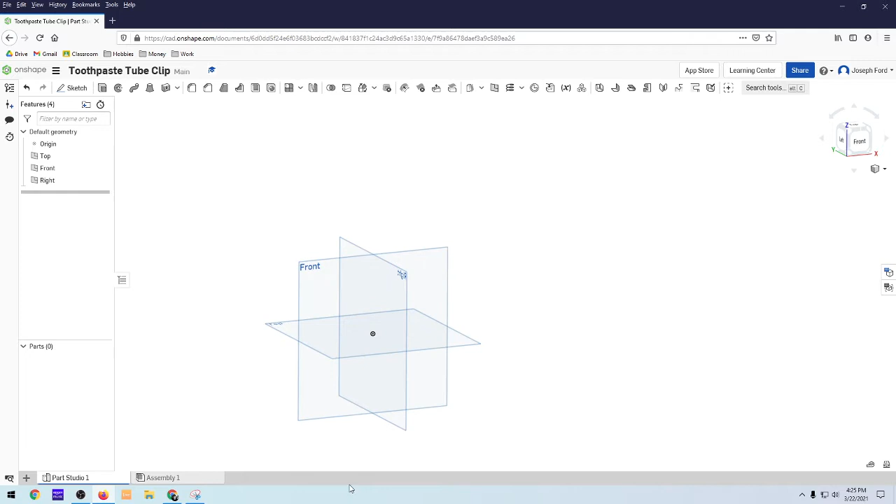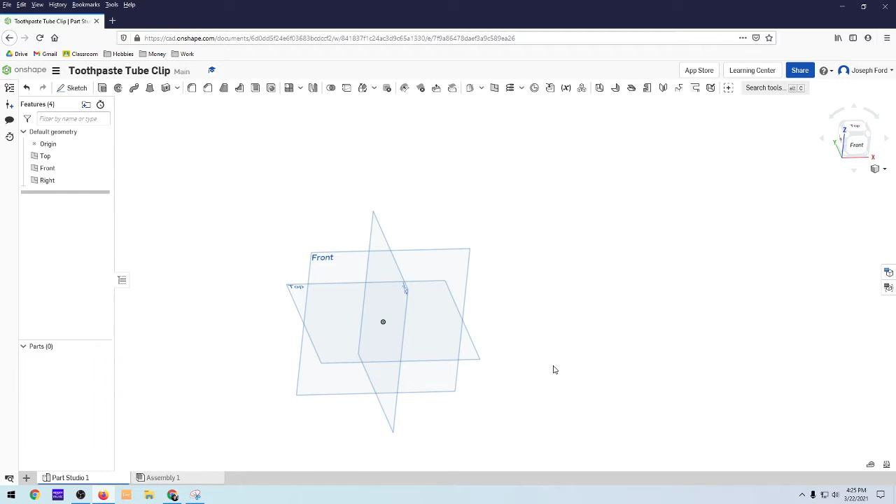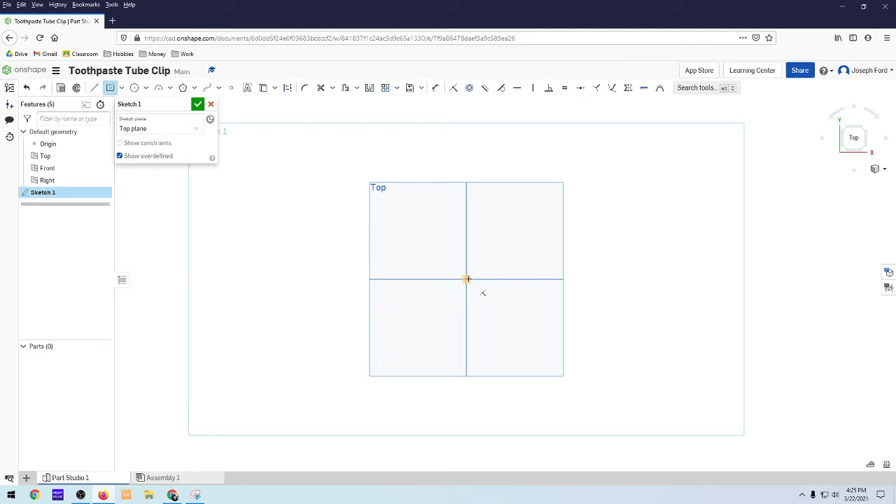First things first, I'm going to make sure the units I'm using are in millimeters. So go down to workspace units, and they indeed are in millimeters. Now I'm going to start with a rectangle on the top plane. I'll go to sketch, click on the top plane, and hit the N key to get normal to that plane. Now I'll click on center point rectangle, get the origin box, click, and make my rectangle.

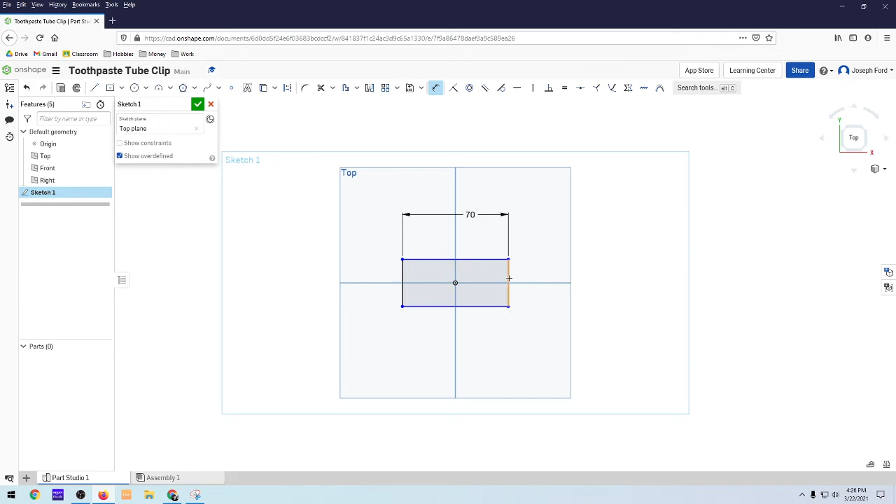I'm going to dimension this out, so D is the hotkey for my dimension. Click up top, and that's 70. And then the side, or the width, is going to be 30.

Now I'm going to continue and make another center point rectangle. This is where the tube is going to fit through, right here. And D for the hotkey on that one.

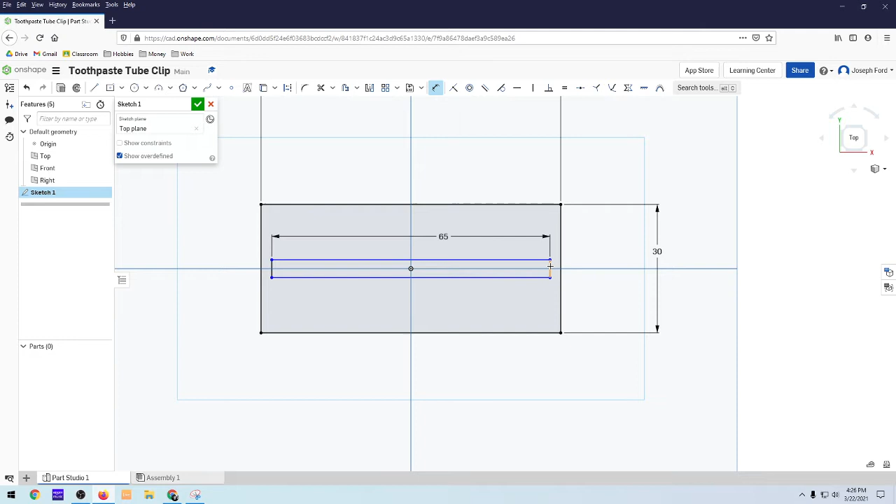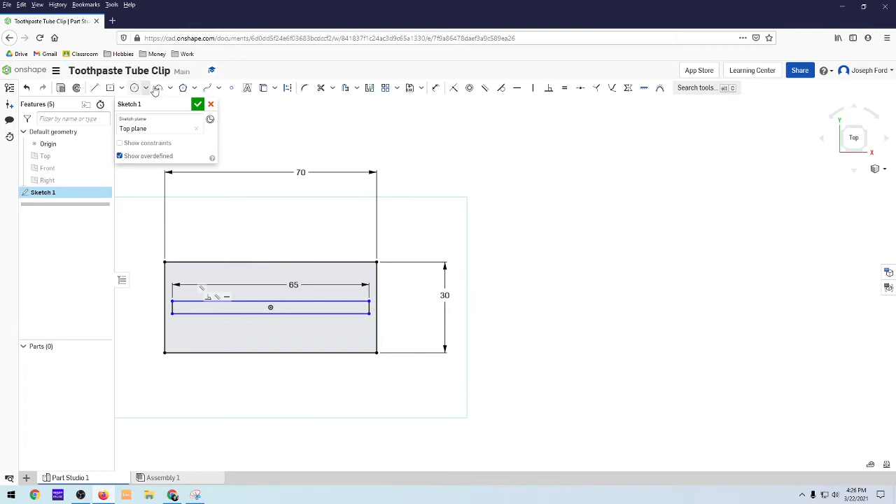65 is used, and the width - what happened there was it happened to click on the plane. So what you can do is get rid of the planes with the hotkey P, if you're not using them at this juncture. That gets rid of them so they're not in the way, and you can just hit P to get them back again. Dimension the side, and that's going to be 1.5.

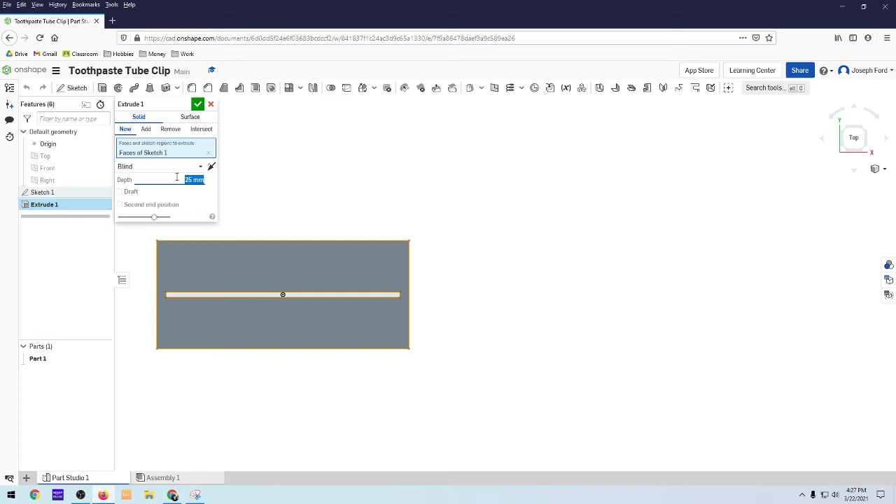Now from here I'm going to extrude out that cube, and notice how that little insert is in there, so that's cool. I'm going to extrude it out by 7 millimeters to make it a three-dimensional part. And that is very cool.

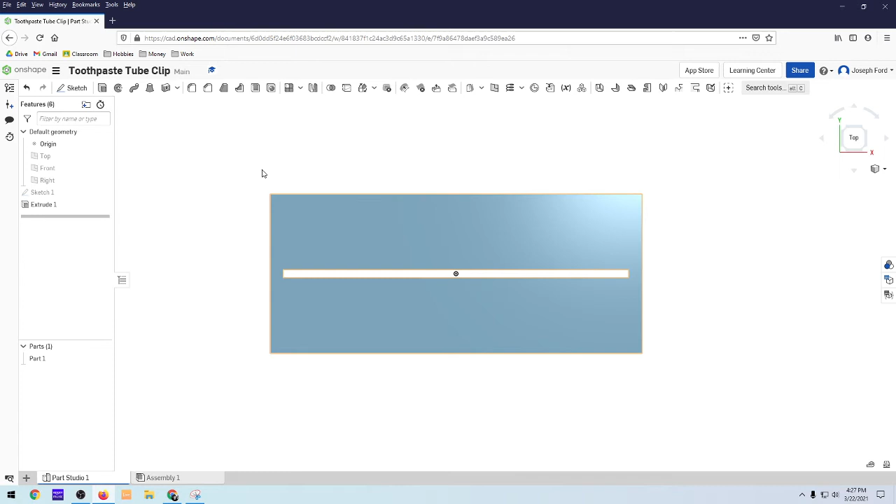So from here, I'm going to make it look a little more stylish and a little more functional. To do that, I'm going to cut some things out of this box. Sketch, click on the top here, and now I can start using some arcs.

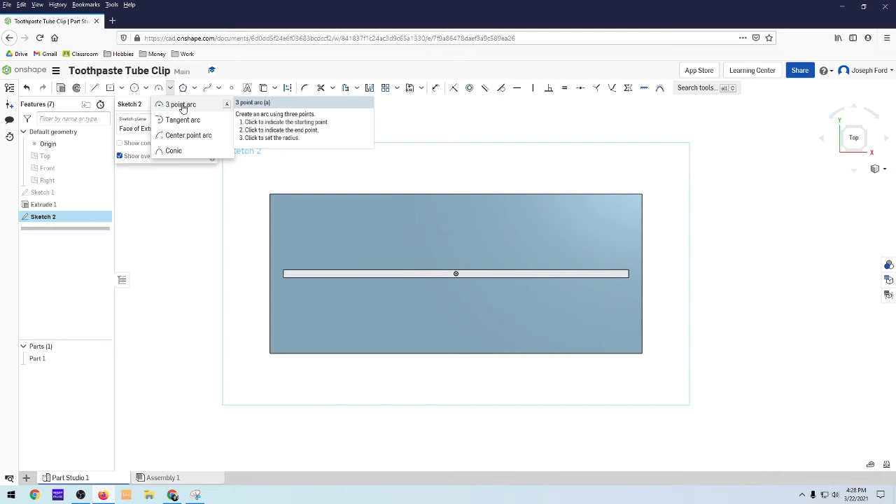A conic arc - you'll have the directions right there to the right. Click to indicate the start point, end point, and then the control point. Tangent arc, 3-point arc - there's all sorts of different arcs, usually with a start, end, and then the radius. We're going to use the 3-point arc, clicking on the start point, the end point, and then as far up as we want to go. And that'll be good right there.

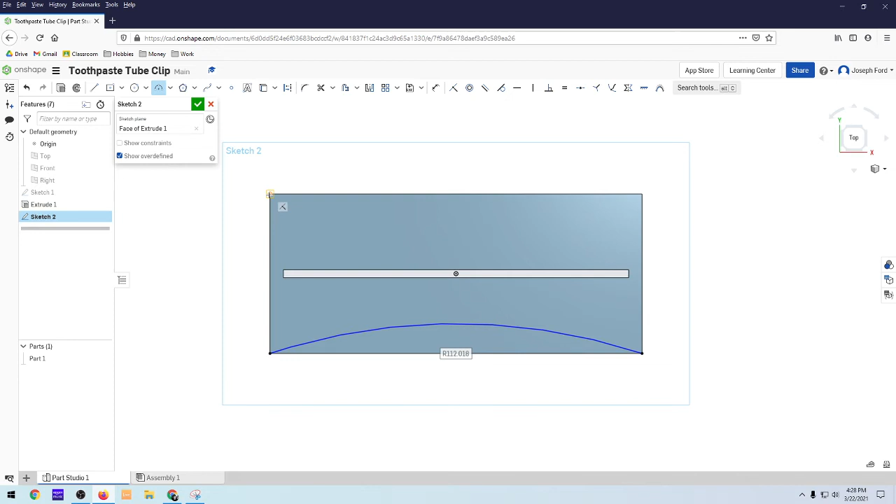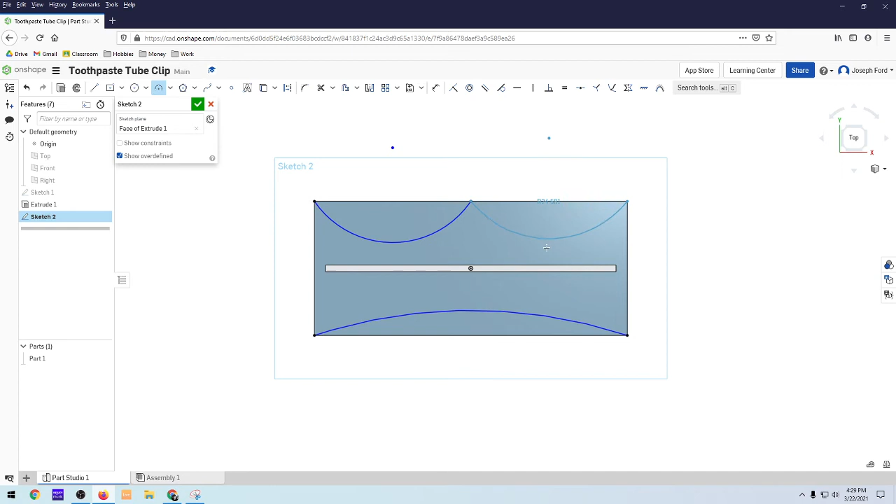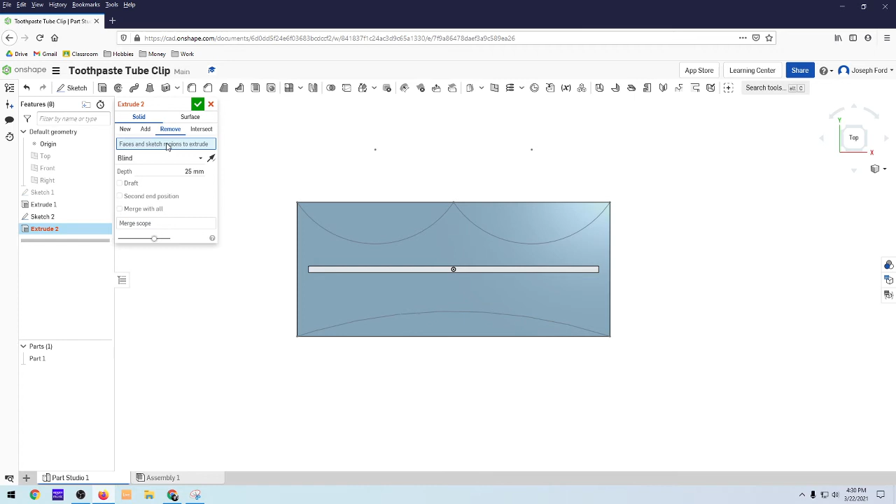So from here I'm going to click on extrude and remove, and click on all the areas I want to cut out. Let me just do that again - I'm in my sketch, click on extrude, click remove. I'm not going to faces of sketch 2, I'll just get rid of that because I didn't close it in. But I can select the regions - select all these regions to cut out and check it off.

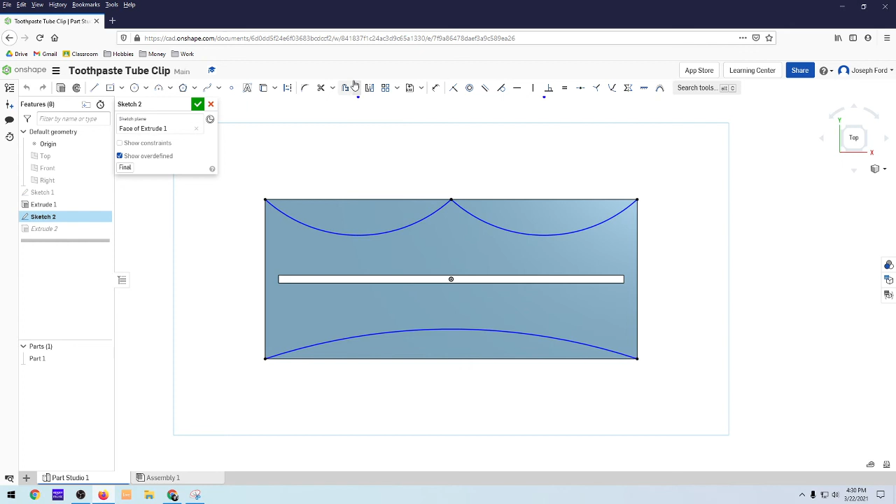Now looking at it, maybe I want to tweak it a little more so it's not as sharp. You can just go back, double click into sketch 2, and tweak your arcs so maybe you want them a little shallower, not as large. Same thing here, maybe you want this to be a little more up. Again, it's up to you what you want to do with it. That looks a little better to me, so I'm going to keep it like that. Feel free to play around with it.

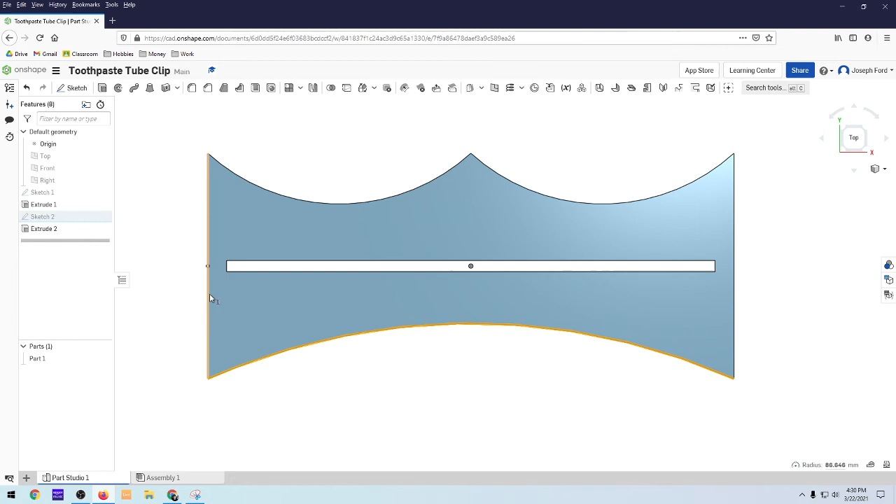The next thing we're going to do is add a chamfer to the slot here. That button is right next to the fillet - the fillet, and then there's a chamfer. So click on the chamfer.

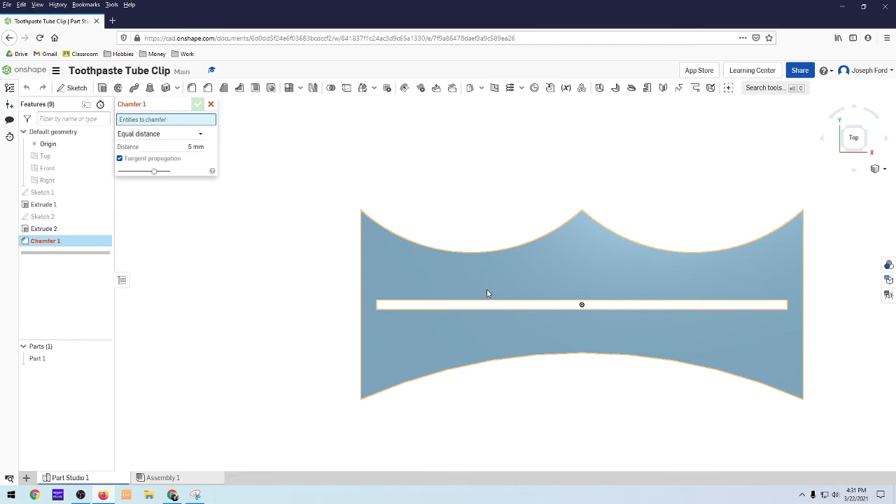Entities to chamfer - we're going to click on this side and on this side. Those were a distance and an angle. It was a 45-degree angle, and the distance was 5 millimeters, actually what it defaulted to. So then we're going to just check it off, and that looks good so far.

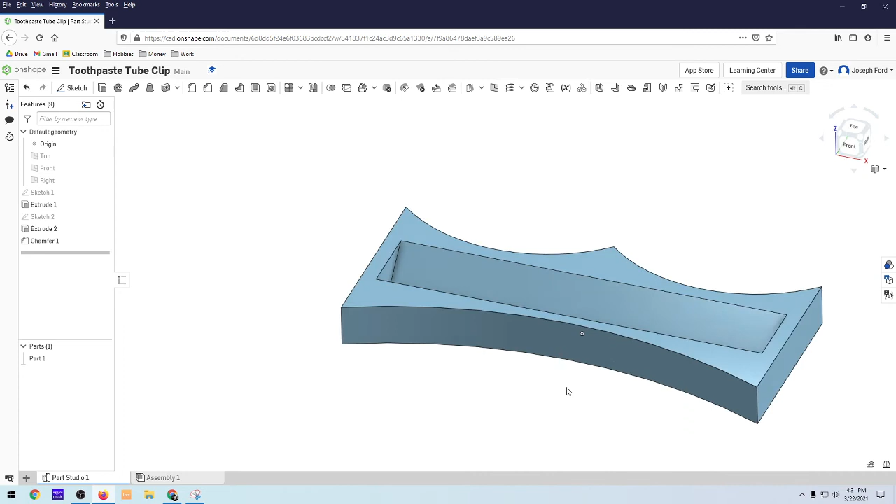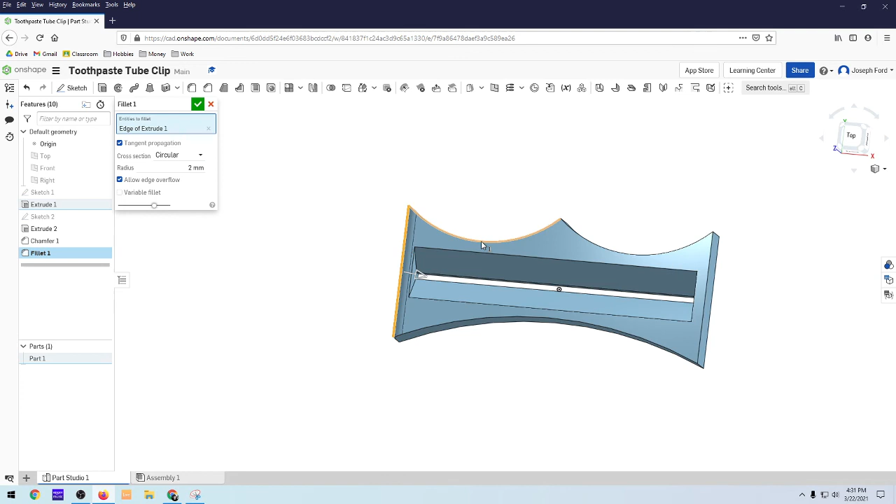And from here, I believe he added some more curves to it, so we're going to add some fillets, and the fillets were at 2 millimeters. Then we're just going to go around and click on all the edges here to get a nice rounded rendition of this toothpaste tube clip.

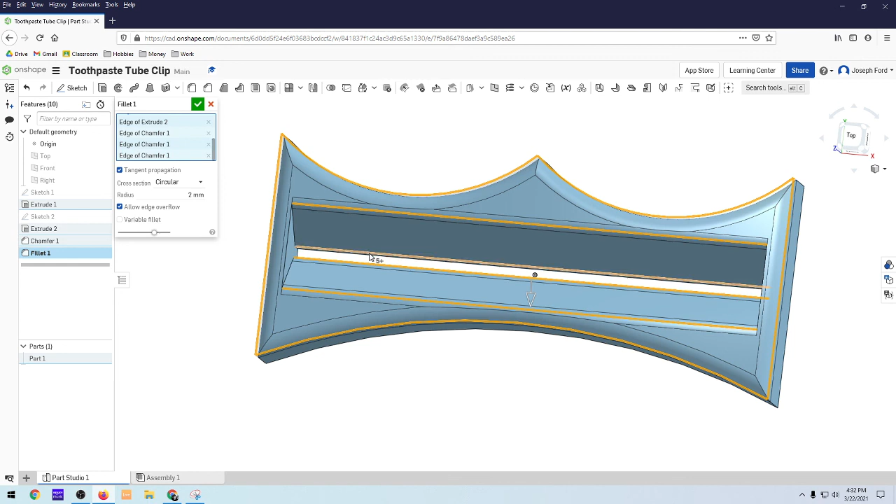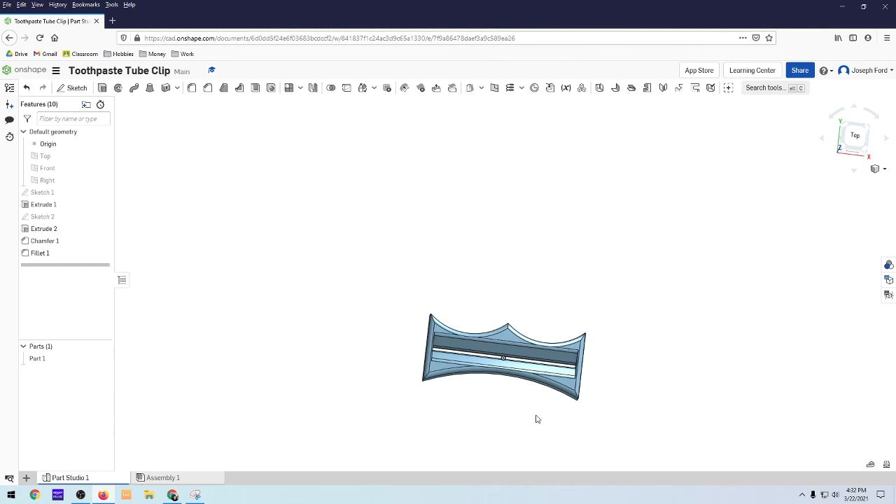So now from here, as you can imagine, you'll feed the toothpaste in through here, and you'll be able to slide on down and consistently have a nice tube of toothpaste. They're actually making sour cream containers like this too, so maybe I'll end up making a bigger one for my sour cream.